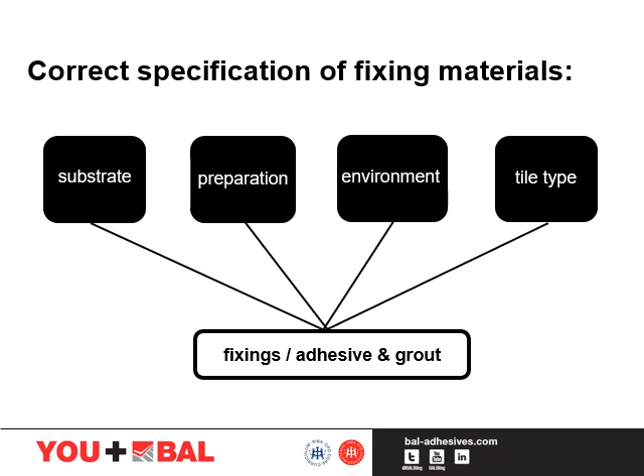General design considerations. Successfully specifying and installing a tiled wall or floor relies on identifying all of the key elements of the installation. These can include substrate, prep, environment and tile type. We'll discuss each of these in more detail during the next few slides.

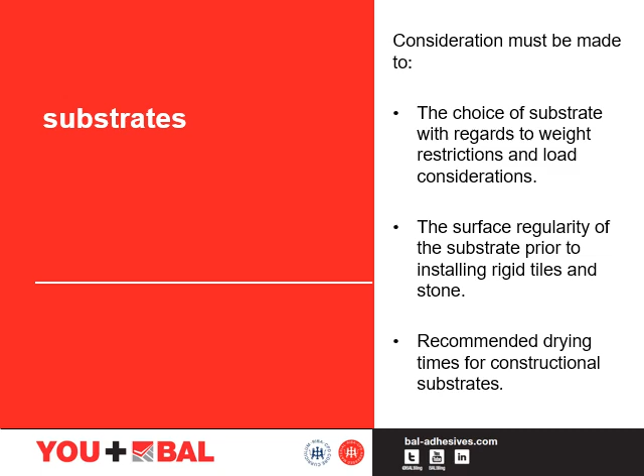When choosing a substrate, we must consider the weight restrictions and load considerations of that substrate, the surface regularity of the substrate when installing rigid finishes like tiles and natural stone, and also the drying times of those substrates. How long do we have to wait before we can tile to them?

Adequate pre-preparation of the substrate is of course important. The dimensional accuracy of the background or base is crucial. BS 5385 tells us that the tolerance for finished floor levels is SR1. This is a surface regularity of 3 mm under a 2 metre straight edge.

When we check the floor with a 2 metre straight edge with 3 mm feet at each end, any gap underneath the straight edge between the points of contact should not exceed 6 mm and there should not be contact between the floor and the straight edge. If the floor surface regularity is not SR1, it should be corrected prior to tiling commencing on site.

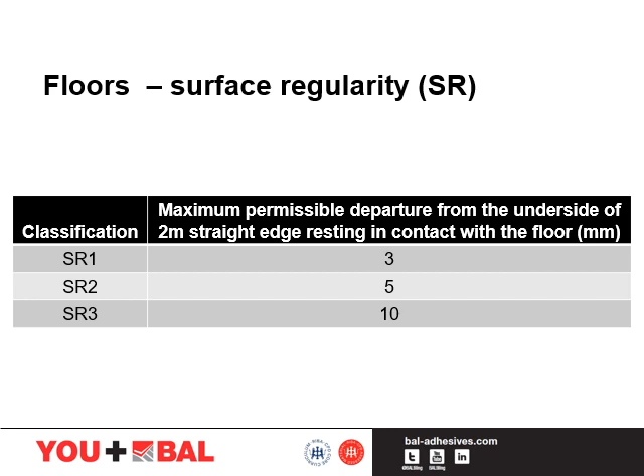This can be done with a smoothing or levelling compound. The recommended drying time for construction substrates is also an essential element for ensuring the success and longevity of the tile installation. The specific requirements are laid down in BS 5385 parts 1 to 5. These are the codes of practice for ceramic and natural stone wall and floor tiling.

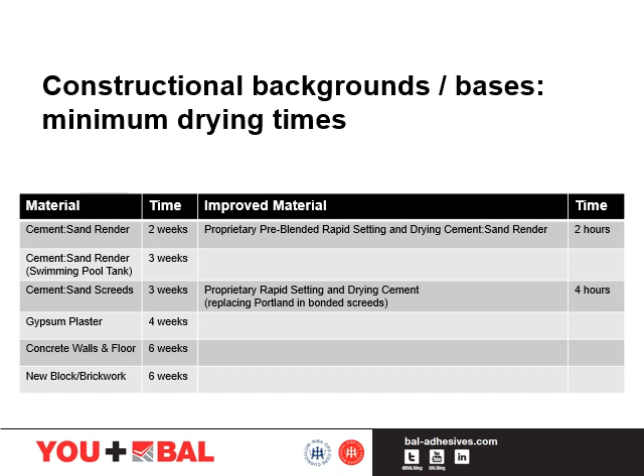Here are some examples of new substrates drying times. Let's take sand and cement render for example, which is 2 weeks. This can be sped up by using a proprietary pre-blended rapid setting and drying render, that can be as little as 2 hours. Sand and cement render in a swimming pool tank can take 3 weeks. Sand and cement screeds normally take 3 weeks, but again, like a render, these can be sped up as quick as 4 hours if you use a proprietary rapid setting or drying cement instead of Portland cement. Gypsum plaster is 4 weeks. Concrete walls and floors are 6 weeks, and new block and brickwork is 6 weeks.

If the substrate to be tiled is not flat and even, any undulations will be reflected in the tile finish. BS 5385-3 2014 recommends a surface regularity of SR1 when fixing tiles using a tile adhesive: no gap underneath a 2 metre straight edge greater than 3mm when placed anywhere on the floor.

If we talk about tanking, looking at a wet room or a shower, we need to protect the substrate. This is for a number of different things: it can protect the integrity of the building fabric and also protect the room from mould and unwanted smells.

Priming: if the surface of the substrate is porous, then this could affect the success of the adhesion of the tiles, so it's always worth priming those substrates. Uncoupling: this may be required because of the variation in lateral movement between the tile and the substrate. Check the substrate for the ability to crack.

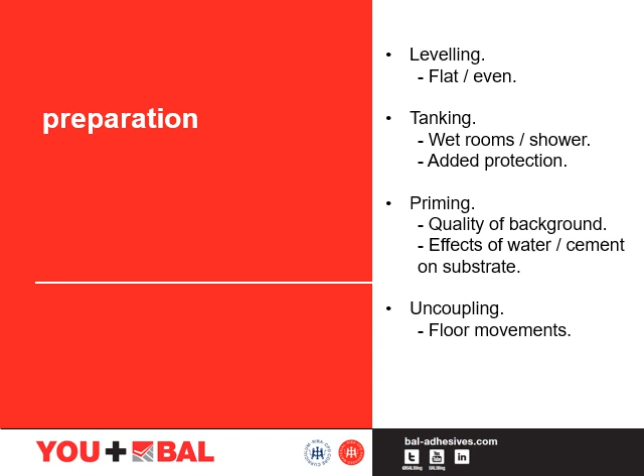The adhesive and grout must be capable of being exposed to dry and wet conditions. We also need to make sure it can withstand changes due to thermal effects, and provide a tiled area capable of withstanding extremely harsh surface conditions. The tile, adhesive and grout must be water and frost resistant. The grout, for example, could also need to be abrasion resistant.

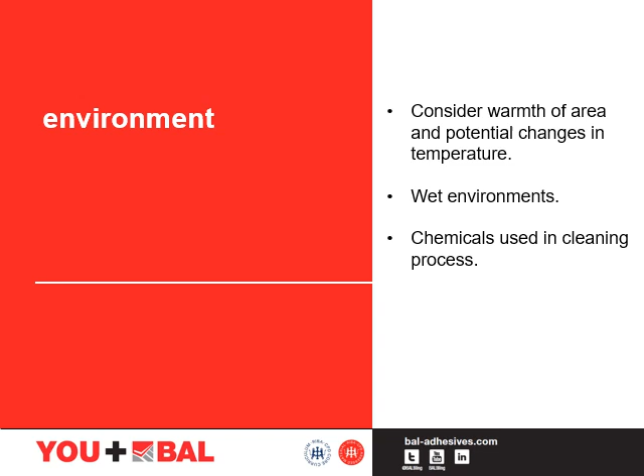So if we have any agitation in the pool, let's say we've got a wave pool or a lazy river, for example, we also need to make sure that these elements can withstand exposure to cleaning chemicals and chemicals used in the swimming pool water.

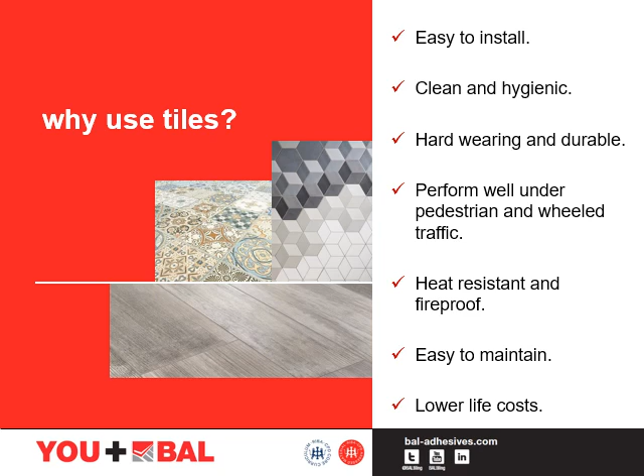There are now thousands of different designs of tiles to choose from. When installing tiles, if they're installed correctly using the right types of materials and specifications, they can be easy to install, hard-wearing and durable. We put a 25-year guarantee on all of our specifications, for example. This allows us to give you the confidence that if they're installed correctly to the right specification, they will be hard-wearing, durable, easy to maintain, and have lower life costs than some other finishes.

The correct selection of a suitable tile is imperative for the long-term success of a project. BS EN 14411 is the standard regarding ceramic tiles, their definitions, classifications, characteristics and markings.

In simple terms, ceramic tiles can either have a porous body, approximately 10% water absorption, or a semi-vitrified body, which is 3 to 6% water absorption. Lower porosity tiles tend to have between 0.5 and 3%, and then we go on to fully vitrified bodies, which is a porcelain tile, and that has a very low porosity of up to 0.5%.

BS EN 12057 is the standard for natural stone. A natural stone is considered a tile when it is no larger than 610mm on one length, and no thicker than 12mm. Anything above that is considered a slab, and these are normally covered in BS EN 12058.

BS 5385 Part 4, the Code of Practice for Tiling and Mosaics in Specific Conditions, offers further guidance on the suitability of tiles for floor tiling in specific conditions, so for use in domestic or commercial showers, swimming pools, changing rooms and high humidity areas, etc. We must make sure that the tile is suitable for the environment into which it is to be exposed.

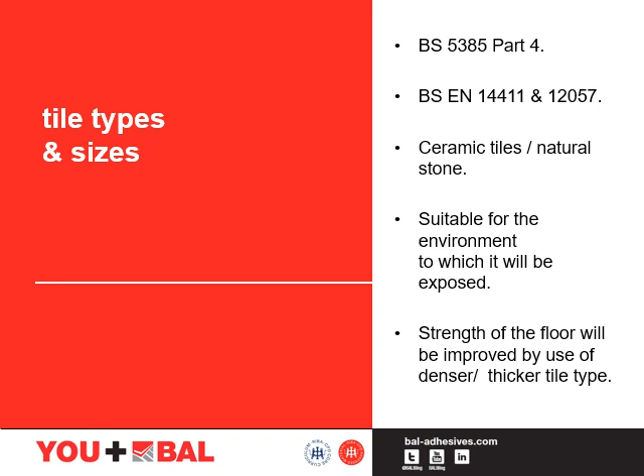In addition, where heavy loads are likely to be imposed, particularly when considering hard rim wheeled vehicles, the strength of the floor could be improved by the use of a dense body, so a vitrified and thicker tile. Further advice should be sought from the tile manufacturer if you're looking to specify that brand.

The health and safety law requires that floors must not be slippery, so they don't put any person's safety at risk. One method for testing slip resistance of ceramic tiles is a pendulum test to BS 7976. This device uses a swinging arm to simulate the slipping foot, and it can be used wet, dry, or with specific contaminants.

Research has shown that the pendulum test is a reliable and accurate way of measuring slip resistance both in dry and wet conditions. For this reason, the HSE have adopted this particular test method.

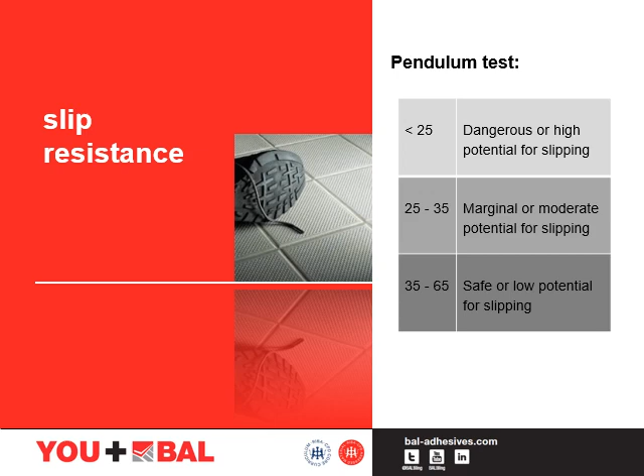In general terms, the slip potential is classed as: below 25 is dangerous or high potential for slipping, 25 to 35 is marginal or moderate potential for slipping, 35 to 65 is safe or low potential for slipping, and 65 plus is extremely low potential for slipping.

Ceramic floor tiles are not slippery when clean and dry. The way we increase the slip resistance of a ceramic tile is to create a rougher surface. Now, the rougher the surface, the more difficult that product will be to clean.

This can be cleaned using mechanical means and things like that, but sometimes it's not suitable. So at the specification stage, it's worth considering the inclusion of a cleaning regime, and this might be aided by discussing the cleaning regime with the tile manufacturer.

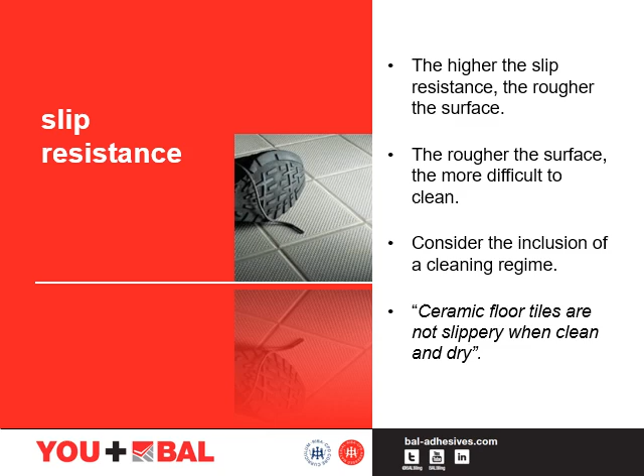There are different types of ramp tests employed in the industry. The DIN, which is a German test, uses oil as lubricant, and the test subject wears boots with rubber heavily profiled soles. The higher the R rating, the greater the slip resistance. R9 is considered the minimum value for use of a tile in a public area.

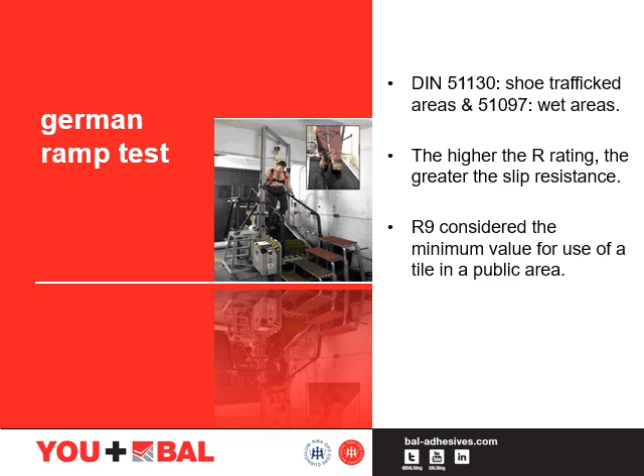The UK HSL has two tests, one using plain water as a lubricant and normal type shoes with 4S rubber soles and heels. Test 2 is again using water, but under barefoot conditions. The CEN, which is the European standard, uses a barefoot ramp test. However, a wetting agent is put into the water.

This table is a guide to the R ratings as determined by the DIN ramp test and the environment or work areas to which the particular value is recommended. It's also wise to note that as the R rating increases, so does the roughness of the tile.

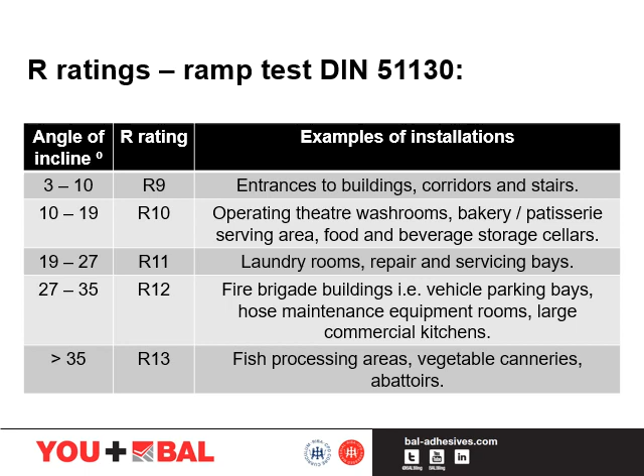First and foremost, safety in use. This should take into account the floor tile slip resistance both in dry and wet conditions, and the solidity of the tile finish, i.e. are the tiles fully bedded in the correct tile adhesive.

Now we need to look at the correct cleaning methods. If we specify an incorrect cleaning method, this could hinder the tile's slip resistance in the long term.

Movement in the substrate. When we look at movement in the substrate, we need to make sure we don't have excessive deflection, thermal movement, or drying shrinkage. Also, the correct placement of movement joints could aid with the reduction of cracking in the tile finish.

Environmental factors. As we discussed on previous slides, are we going to have a heavy traffic load, and what's this going to do to the tiled finish? Also, are we tiling in an area like a workshop where we have the possibility of heavy objects being dropped? This could cause major impact damage.

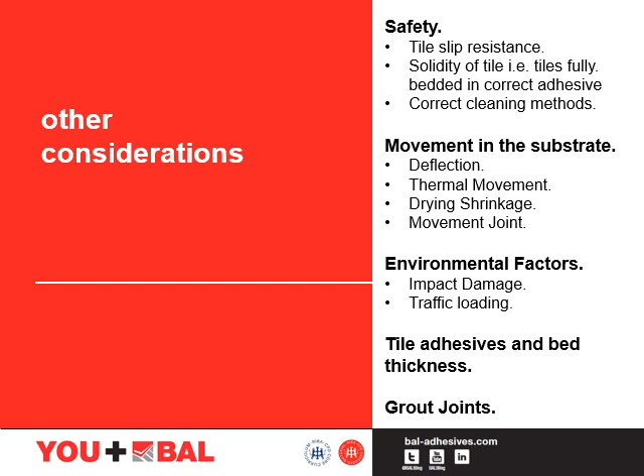We're now going to move on to looking at tile adhesives and grouts, and the correct selection of materials.

Tile adhesive classification and standards. We have three categories of tile adhesives: cement-based, dispersion and reaction resin. Cement-based normally comes in a bag of powder and is mixed up on site. Dispersion comes in a tub which is water-based and ready mixed, ready for use. A reaction resin is normally a 2 or 3 part product with a resin and a hardener.

Moving on to the classifications, we have 1, which is a normal adhesive, and 2, which is an improved adhesive. This meets the requirements for additional characteristics. Then we have a lettered system.

F is a fast setting adhesive, normally cementitious only, and that achieves 0.5 newtons per millimetre squared within 6 hours. T, which is reduced slip, is normally used on walls. And then E, which is an extended open time, over 30 minutes, is for cementitious and dispersion adhesives only.

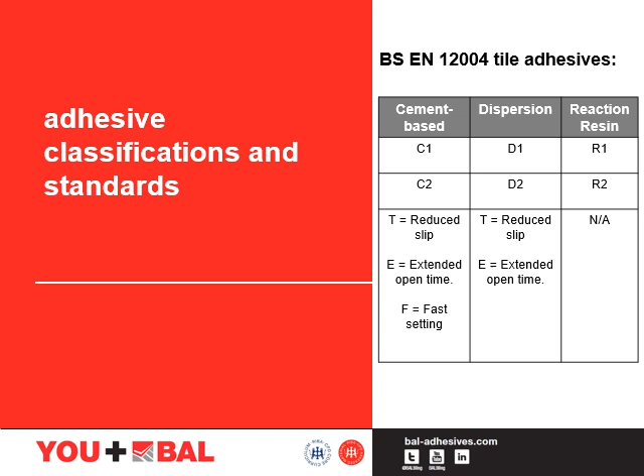BS EN 12002 has a test to measure for transverse deformation of tile adhesives. This gives us S1, which is deformable, and S2, which is highly deformable.

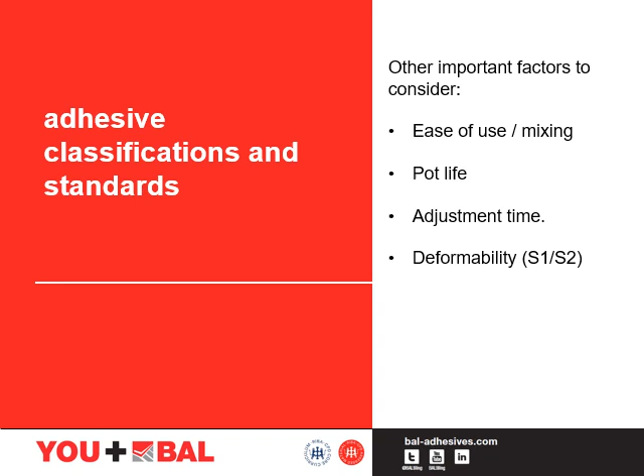Grout classifications and standards. In this section we have cementitious and reaction resin. Cementitious is normally, again, a bag of powder, and reaction resin is normally a 2 or 3 part product which you mix together, which is either a resin, a hardener and a colour, or a resin with a hardener and colour mixed together. The cementitious grout has 2 categories: 1, which is a basic grout, and 2, which is an improved or polymer modified grout.

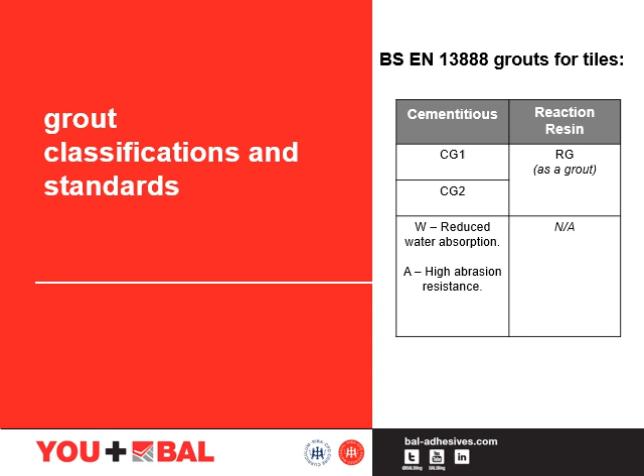The lettering system gives us W on the cementitious side, which is reduced water absorption, and A, which is high abrasion resistance. The main difference between a cementitious grout and a reaction resin grout is that reaction resin grouts are more often waterproof.

So on to tiling in wet and damp environments. It's likely that tiling will be carried out within a leisure installation, which might then be subjected to different environmental conditions like the ones listed on this slide.

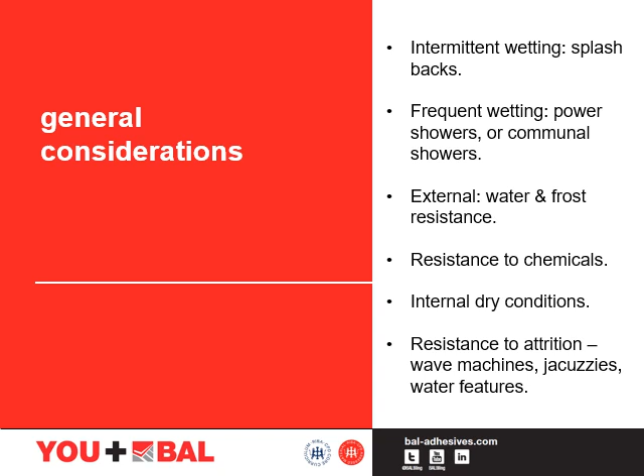One of the main reasons for utilising ceramic tiles, for example in pool halls and shower changing rooms, is their ease of cleaning and maintenance. When properly installed, maintained and regularly cleaned, tiles will provide a long-lasting, durable and trouble-free wall or floor finish. Choosing an appropriate cleaning regime is also important. The Tile Association offer further guidance on this in their document, The Cleaning of Ceramic Tiles.

So in this section we're going to look at different types of swimming pools. Fundamentally, a swimming pool is a water retaining structure. There are many different types of swimming pools. Some of the more common pool types include a competition pool. These are rectangular shaped, either 25 or 50 metres long and at least 1.35 metres deep.

Competition pools are generally indoors and heated to enable their use all year round, and tiling to the pool tanks with facilities for competition swimming or water games, etc., are defined by ASA or FINA requirements to ensure that there are no cut tile pieces, and require racing lane markers and timing pads.

An Olympic pool is a pool that meets FINA's additional standards for the Olympic Games and World Championship events. It must be 50 metres in length by 25 metres wide, divided into 8 lanes of 2.5 metres each, and 2 areas of 2.5 metres each side of the pool. The water must be kept at 25 to 28 degrees Celsius, and depth must be at least 2 metres.

Freeboard pools are the most common, where the water level is lower than the top of the pool surface, and is removed via a skimmer built into the wall.

Free-form pools are designed to have an irregular shape, often curves and graceful lines. These are used for leisure or private swimming pools and can often have wave-making facilities, rapids or lazy rivers, or even flumes.

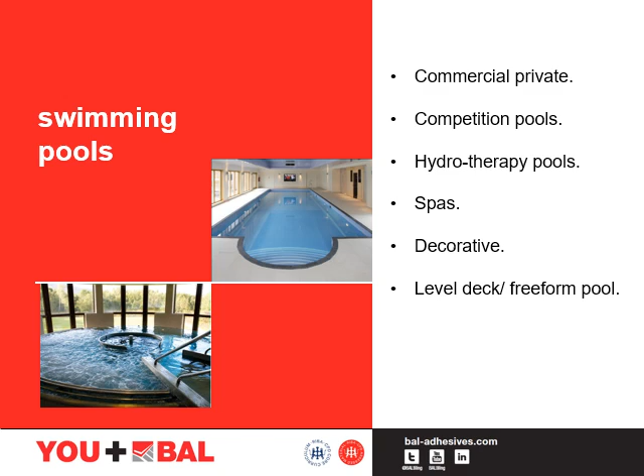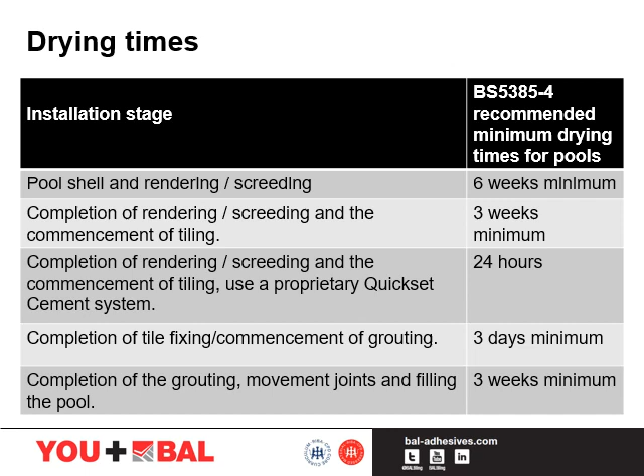On this slide we're showing a table which details the drying times of constructional backgrounds when used in a pool tank. Normally, under no circumstances would we reduce these intervals. A longer period is sometimes necessary in wet weather or poor drying conditions, but by replacing Portland cement in screeds and renders with a rapid setting cement or a pre-blended product, we can reduce these, sometimes down to 2 hours for a render and 24 hours for a screed. It's always advisable to check with the manufacturer of those products prior to specifying them.

Any joints in the structural shell designed to accommodate movement should be carried through to the face of the tiling. Movement joints should be incorporated in the pool lining, around the perimeter, at junctions at the bottom of the sides, vertical corners, and at any changes in plane in the bottom of the pool. It's advisable to insert additional movement joints down the pool sides and across the bottom in a continuous loop at 6 metre intervals or less, to suit design considerations. Movement joints should also be inserted at the junction of the pool tank and the promenade deck.

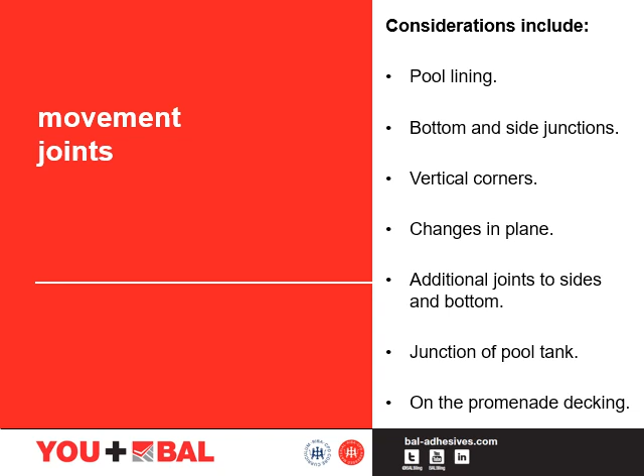The Tile Association recommendations are for a water calcium hardness of at least 250 mg per litre, or bicarbonate alkalinity of at least 80 mg per litre. Both of these are expressed as CaCO3. Sulfate levels should typically not exceed 300 mg per litre. So for grout, if we've got hard water which is over 250 mg per litre, we need to use a modified cement-based grout, which is a CG2 grout. For soft water, which is less than 250 mg per litre, it's advisable to use an epoxy-based grout, or an RG grout.

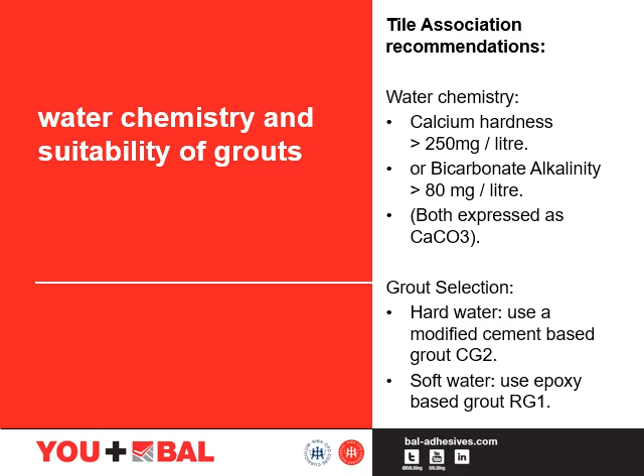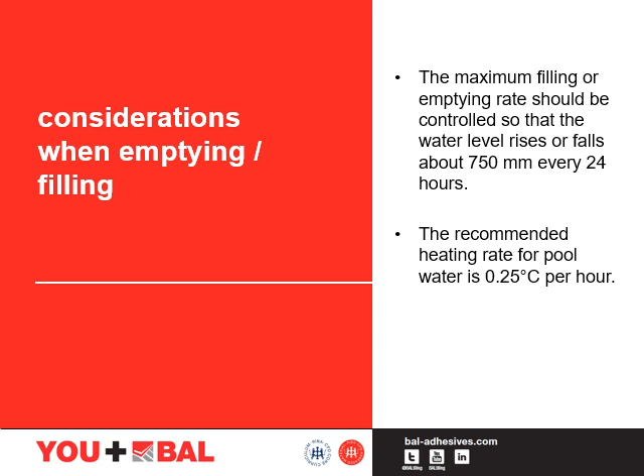Pools should be filled and emptied slowly to minimise stresses due to loading and thermal changes. The maximum filling or emptying rate should be controlled so that the water level rises or falls around 750 millimetres every 24 hours. The recommended heating rate for pool water is 0.25 degrees per hour, to minimise the effects of thermal movement during the heating process.

Moving on to wet rooms. In a wet room, the walk-in shower area is usually level with the surrounding floor but with a slight slope to the drain, which is fitted directly into the floor. They're particularly useful for someone in a wheelchair with level entry to the shower area. A wet room is more versatile than the conventional shower tray enclosure, giving more options in bathroom design. The concept allows the showering area to blend naturally with the rest of the room.

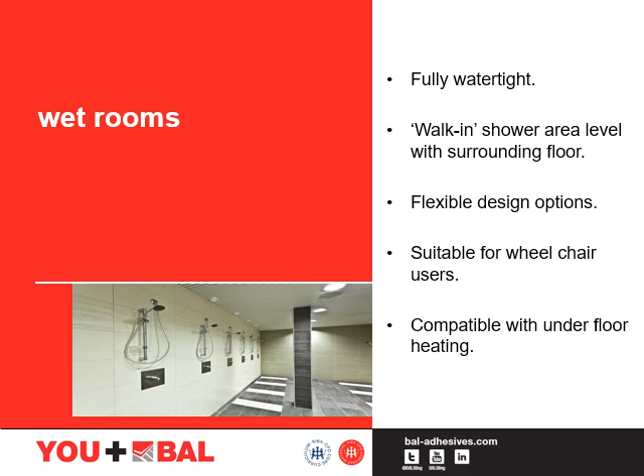Some types of underfloor heating systems can be used within wet rooms. Without proper waterproofing protection, water penetration and ingress behind the tiled finish can cause serious damage to wet room installations in the long term. BS 5385 Part 4 states that the use of ceramic tiles together with an impervious grout and adhesive are not a substitute for a tanked installation. The effects of water damage are well known and well documented. Therefore, incorporation of a suitable waterproofing membrane is a prerequisite for a wet room installation, either within the building structures or ideally on the substrate prior to tiling.

Surface tanking membranes are ideal as they are able to prevent water from tracking through a screed, for example, into other areas. In a wet room, waterproofing should be specified on both walls and floors.

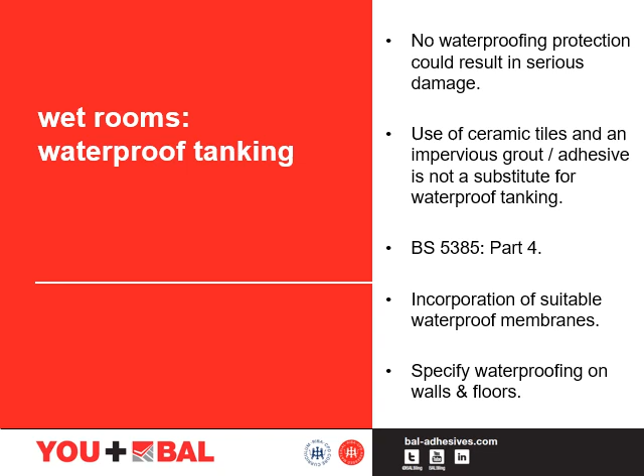There are two main types of liquid applied tanking membranes compatible for use with ceramic tiling installations. Single part membranes, such as a single component liquid applied water impermeable product like an aqueous polymer dispersion based coating, and a two component membrane. These can be cementitious polymer dispersion based or based on epoxy and polyurethane resins.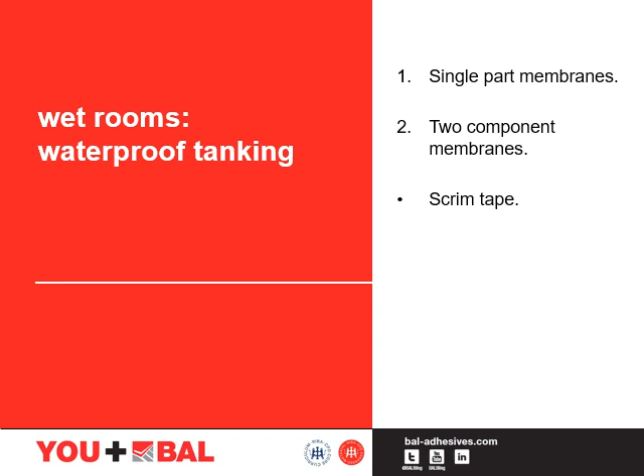We always use a scrim tape to reinforce the membrane in areas subject to movement, such as pipe penetrations, drainage outlets and channels, and junctions between different bases and background substrates. It can also be used to bridge any cracks within the base of the background, and used in internal and external corners and partitions within boards, if boards are being used.

So, considerations for disability awareness: we need to look at slip resistance of the floor, which should give a firm foothold and good wheel grip in any dry or wet conditions. We should also look at colour contrast for increased visibility for fixtures like grab rails, skirtings and seatings.

BS 5385 advises that falls in the floor should be a minimum of 1 to 80 and a maximum of 1 to 35. Anything steeper than 1 to 35 may be inconvenient and may also be dangerous. The rate at which water drains away from the floor should be greater than the flow rate of water produced by the shower head.

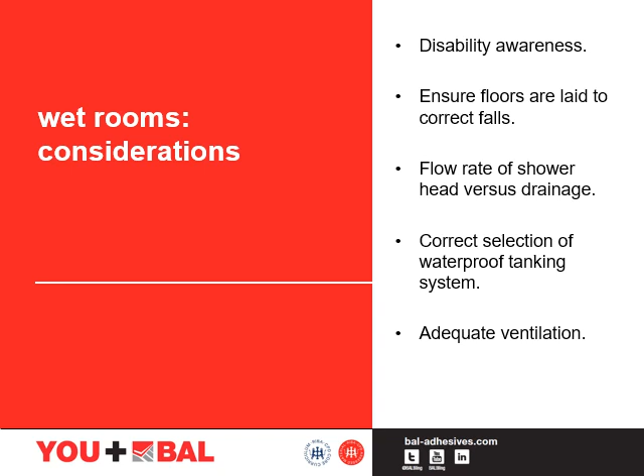Incorporation of a lower flange enables the waterproof tanking system to be dressed into the gully and form a watertight seal. The waterproof tanking system should be suitable to both receive a tiled finish and be compatible with the type of drainage system selected. Efficient removal of water vapour and adequate ventilation and dehumidification help reduce the risk of mould growth.

Now let's take a look at changing rooms. There are a few key points to consider when specifying tiling in wet room areas. What's the substrate? What are we tiling to? Is there underfloor heating, or is there underfloor heating to be installed? And what are the requirements for slip resistance for safety reasons? That could change the type of grout we specify, for example.

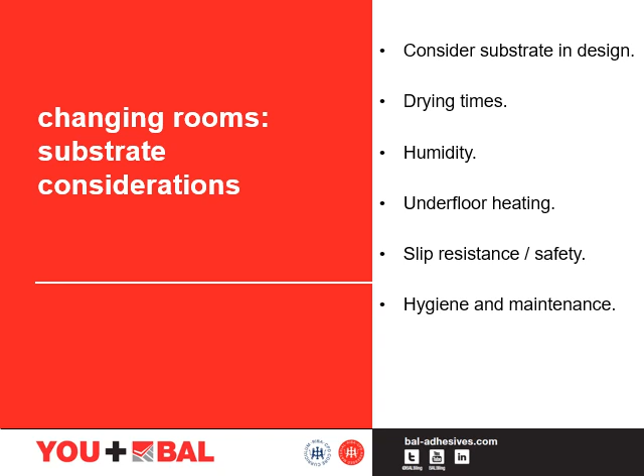Cleanliness and hygiene are important for ongoing maintenance, and this should be specified at the installation stage to solve any issues going forward. The effects of thermal expansion and contraction need to be accommodated and controlled. There are four important factors which can influence the success of any tiled installation over heated floors, and these need to be considered and accommodated within any tiling specification. We must consider the effects of differing expansion and contraction rates for the floor type versus the substrate, as they will move or expand and contract at different rates, and this could cause problems.

We need to minimise the thermal and shrinkage movement stresses. It's important to commission the underfloor heating prior to the commencement of tiling and also post the completion of tiling. The correct placement of movement joints controls stresses both within the tiling and the substrate. We also need to choose the right adhesives and grouts. Using a flexible polymer modified adhesive and grout will also help with movement stresses.

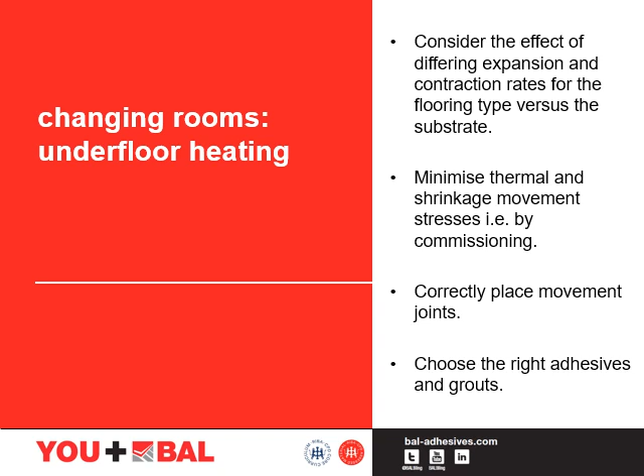Safety in use is the utmost concern in commercial wet areas like changing rooms. Choosing tiles with the appropriate slip resistance is important. As a rule of thumb, the higher the slip resistance, the rougher the tile surface, and remember to refer to industry test standards when selecting the right tiles. We have the pendulum test to BS 7976 and the German ramp test, which is DIN 51097, both of these for wet areas.

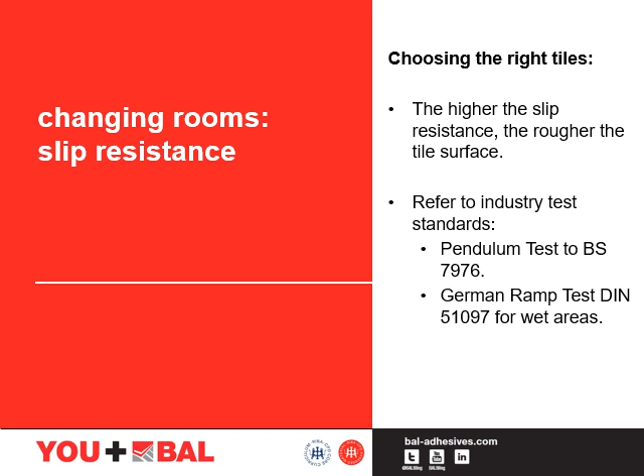It's advisable to include the cleaning and maintenance regime at the specification and design stage. This will influence the choice of tiles and their slip resistance, and also the grouts and sealants for movement joints. We would avoid the use of aggressive chemicals and products with a high acidic or highly alkaline nature. These agents can attack cement-based products, causing damage in the long term.

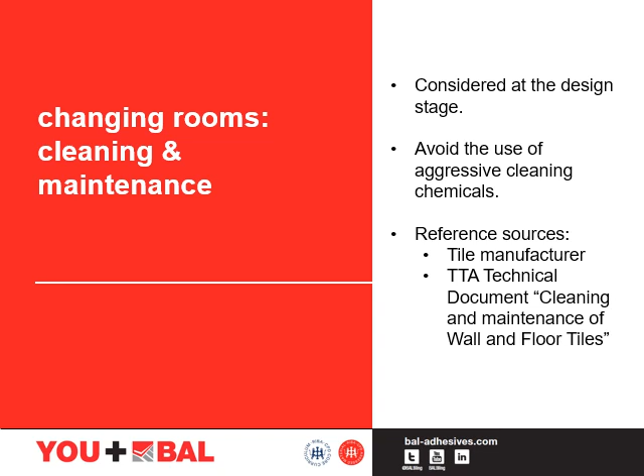Table 2 of British Standard BS 5385 Part 3 has useful information regarding resistance to intermittent contact with various liquids and characteristics for different grout types. Epoxy grouts are in general chemically resistant to splash contact for a range of dilute acids, alkalines and solvents. So it might be worthwhile swapping a cement-based grout out for this if you do have any products that might cause damage to cement-based products. The TTA technical document on cleaning and maintenance of wall and floor tiles offers additional advice with regards to the cleaning of glazed and unglazed ceramic tiles and also natural stone.

So now we'd like to talk you through a couple of case studies.

Huddersfield Leisure Centre is a 12,500 square metre, £36 million leisure centre development in the heart of West Yorkshire. It's a good example of differing environments and challenges that we had to consider. It features a range of top sporting and leisure facilities, including a 25-metre competition pool, a 20-metre training pool with a movable floor, and a family leisure pool with interactive water features, water flume and sidewinder. The new centre was designed to meet the client's brief for a multi-purpose sporting and leisure facility for the local community, which complements the existing street pattern and contributes to the regeneration of the town and surrounding region.

The project featured more than 10,000 square metres of tiling in the main changing rooms, upstairs changing rooms, pool surround, leisure pool and main swimming pools. This called for numerous preparation products such as screeds, renders, primers and bonders, as well as a number of different tile adhesives that were utilised based on the environment, substrate, tile type and installation need.

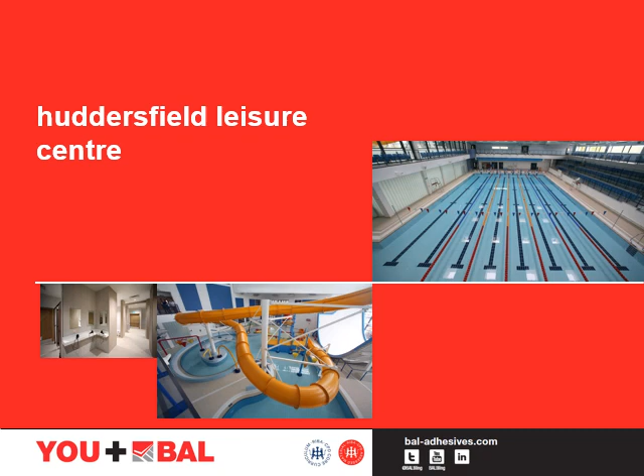The stunning £45 million redevelopment of Tate Britain was an award-winning example of tiling in leisure. The transformation included the Millbank project, creating new spaces within the national home to 500 years of British art. Stonework specialists completed 2 packages in the Grade 2 listed building's southeastern quadrant on staircases and flooring, involving both new build and restoration work. As a major addition to the museum's former layout, a large opening through the floor of the main entrance rotunda allowed a new staircase to be inserted.

A further 2,000 square metres of flooring included a stunning geometric design that extends through the lower level of the museum, the canteen, public areas and lower rotunda. The flooring at the top of the grand staircase has a complicated fleur-de-lis pattern that echoes the design of the staircase balustrade. In addition, 500 square metres of agglomerate skirting, dados and reveals were installed. A further 800 square metres of terrazzo flooring on the principal and upper levels, and the marble mosaic flooring in the entrance hall, were also cleaned and repaired.

Specialist product selection was key to use across the range of different tile types and to ensure ease of installation and the highest quality results of aesthetics to last a lifetime. So thank you for your time, and if you do have any questions or would like to discuss any projects, please do get in touch using the information at the beginning of the presentation.